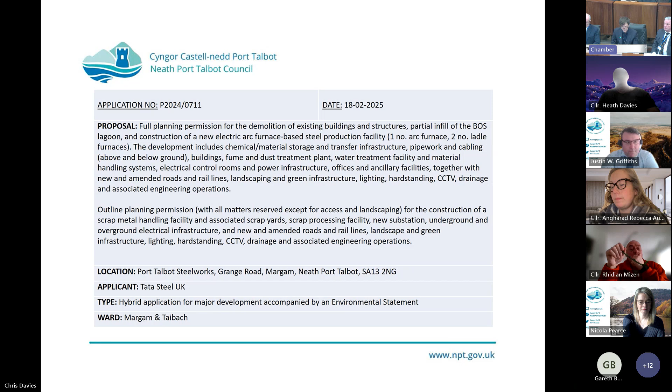The application site extends to 159.6 hectares. Its boundary, shown on the plan, is irregular in shape and includes the following parts of the existing steelworks: a continuous casting plant, slab yards, part of a basic oxygen steel making (BOS) plant to the northern part of the site, an operational lagoon in the centre of the plan, steel service centre, Margam Colliery Memorial in the centre of the site, a haul road forming the westernmost boundary, coal yards in the southwestern area, and areas of grass meadow to the south.

Where you see indication 1 on the plan, that is the area where the electric arc furnace will be constructed. This plan identifies the areas of Port Talbot, the heavy end with the former blast furnace and sinter plant. You can see the ABP jetty, Swansea Bay, and indications for the main railway line, the PDR, and the M4 to the east.

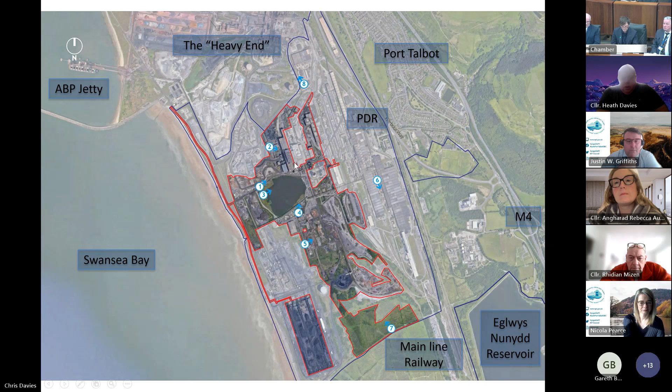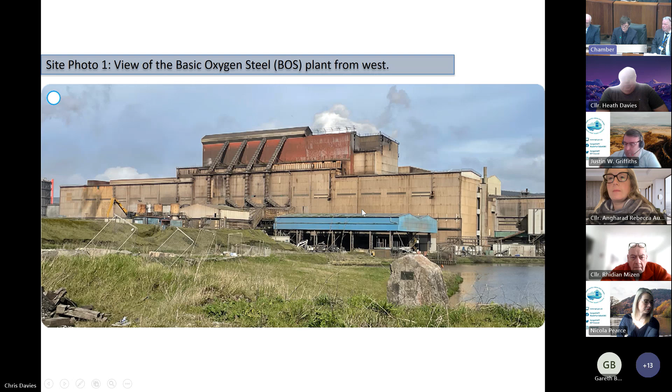So number 1 is the basic oxygen steel plant, the BOS plant. For context, that building is approximately 430 metres long and 60 metres high. You'll see this plant in a number of the images below, and this is the plant that the electric arc furnace will be constructed predominantly around.

Areas 2 and 3. Area 2 is a close-up view of the BOS plant from the west, and photo 3 shows a view across the operational lagoon.

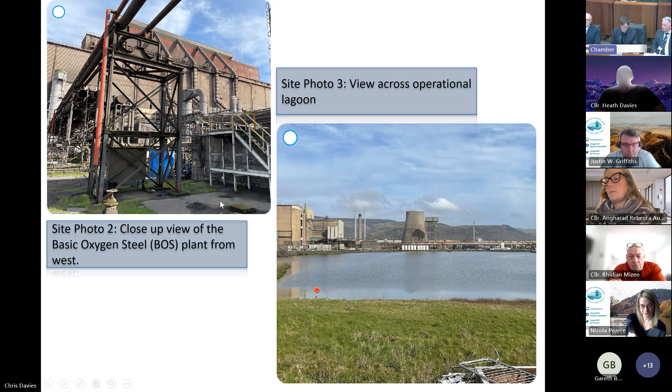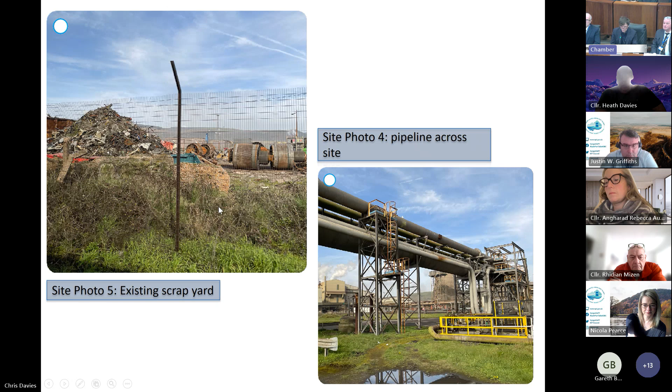4 and 5. Image 4 shows the elevated pipelines across the site, and 5 shows the existing scrapyard area.

6 and 8. These show you the views between the existing rolling mills, which are quite large structures within the wider landscape of the steelworks. And 8 shows the blast furnaces to the north of the site.

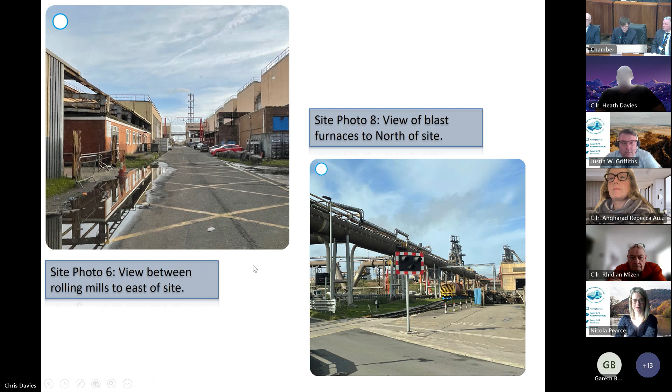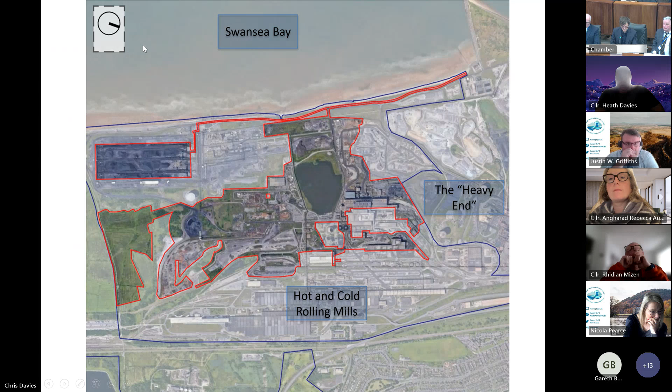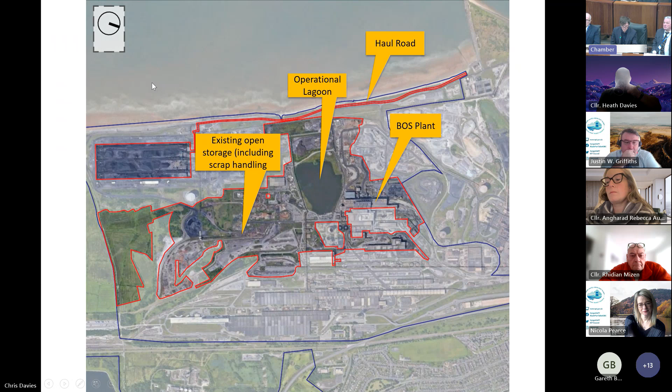Again, some further images of the site from outside, looking into the site from various directions: the BOS plant, the haul road, the operational lagoon, existing open storage including scrap handling, existing coal stockyards, and the Southern Grazing Fields Lagoon.

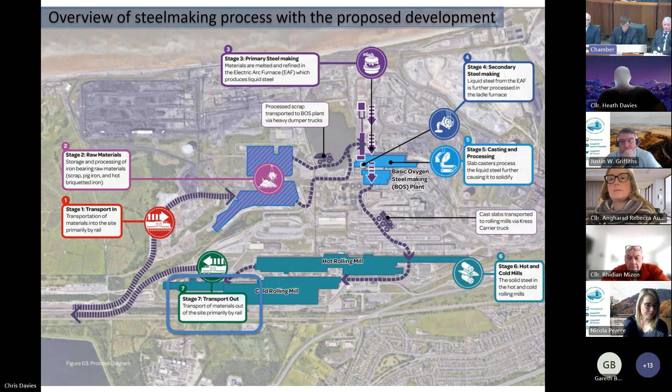The main components of the proposed development can be summarised as follows. The full planning application consists of alterations to the BOS plant, a secondary refining building collectively comprising the EAF, water cooling systems and water treatment plant, fume and dust extraction systems with stacks, offices and ancillary facilities, the partial infill of the BOS Lagoon, new and amended rail tracks and infrastructure, new and amended roads, gates and parking areas, and landscaping and green infrastructure. The outline area, outlined in red but outside of the green, covers the scrap metal reception, handling and processing facilities and associated scrap yards.

This also includes new substations and overground electrical infrastructure, amended access roads and parking, and amended rail track and associated infrastructure. Full details are set out within the report, with these areas defined on pages 14 to 19. This proposal is the largest initial element of the overall investment of £1.25 billion within the Port Talbot Steelworks.

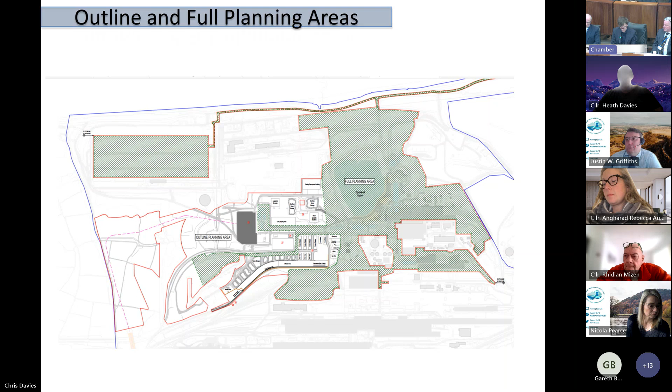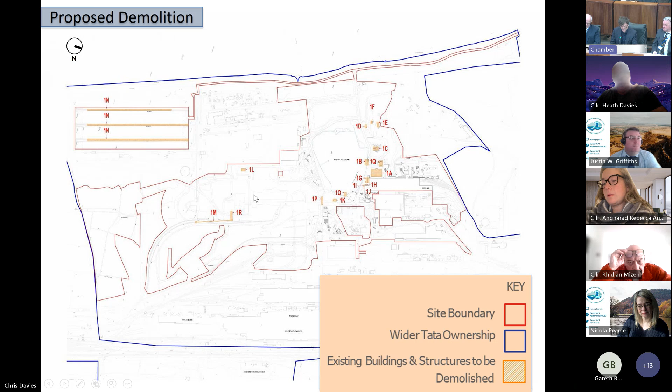This plan gives you an indication of the structures to be demolished as part of the proposal, to make way for the proposed development. These are some of the structures and buildings that will be taken away to facilitate it, along with further structures that will be demolished.

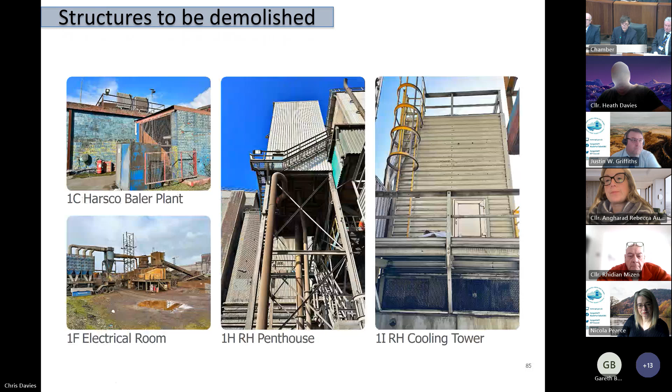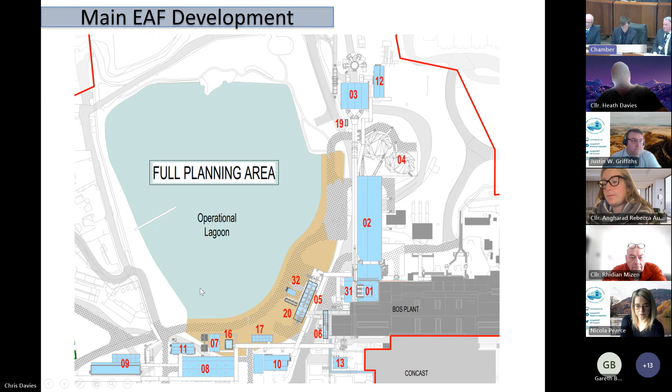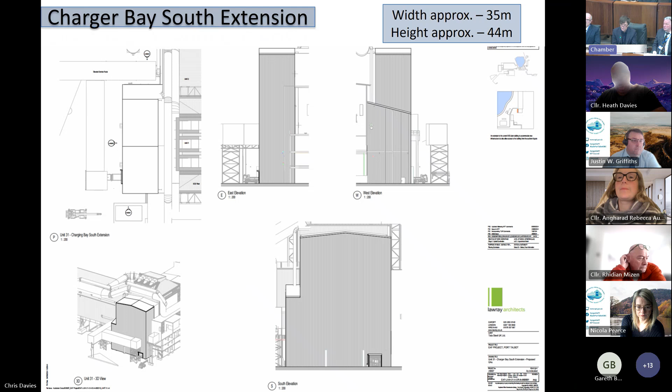These are the main components of the EAF itself: the Charger Bay South extension, an extension to the side of the existing BOS plant, and a canopy hood that will be attached to the roof of the BOS plant itself.

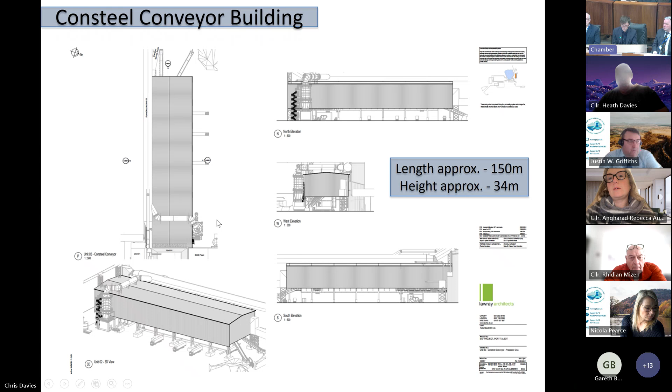The Consteel conveyor building—to get a sense of scale, you can see the trucks in the bottom corner of the plan underneath the conveyor. This will convey the scrap steel into the electric arc furnace itself.

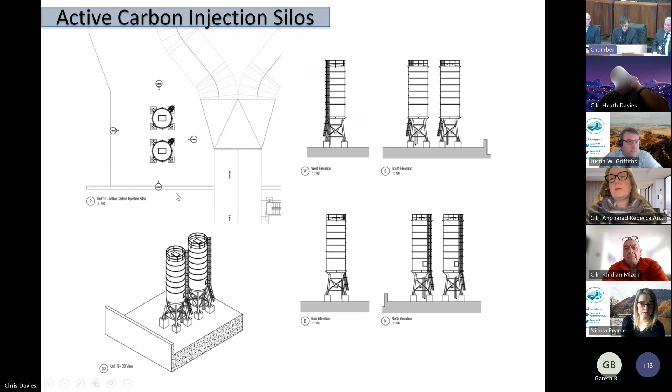Fume treatment building and stack. Active carbon injection silos. Ferroalloy bunker. Hot briquette iron dolo lime bunker, and powder silos.

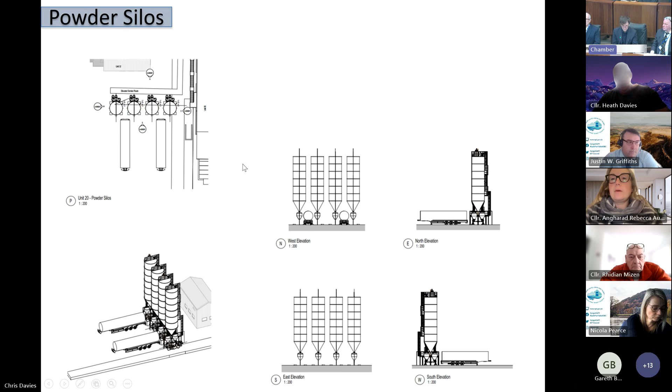These are the main components and how they sit alongside the EAF and the lagoon. Molten metal will be tapped from the EAF at a production rate of 320 tonnes of steel every 42 minutes, creating an annual production capacity of approximately 3.2 million tonnes per annum.

The fume extraction plant includes active carbon injection and dust bag filters, which will be subject to environmental permit, requiring the use of the best available technologies issued by NRW.

The EAF input and output are summarised on Table 1 on pages 23 to 27 of the report, and the ES provides the following indicative programme of works: commencement of construction mid-2025, construction complete late 2027, commissioning mid to late 2027, and operational first melt early 2028.

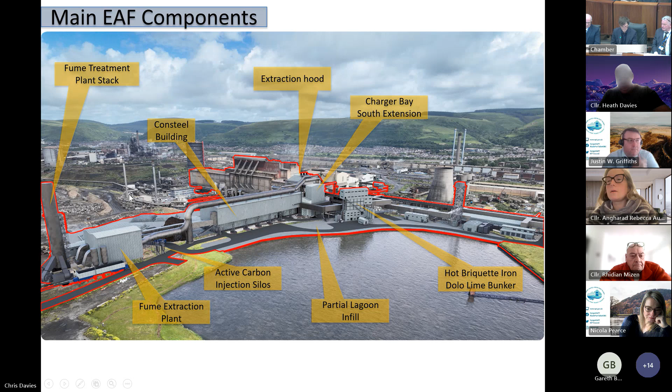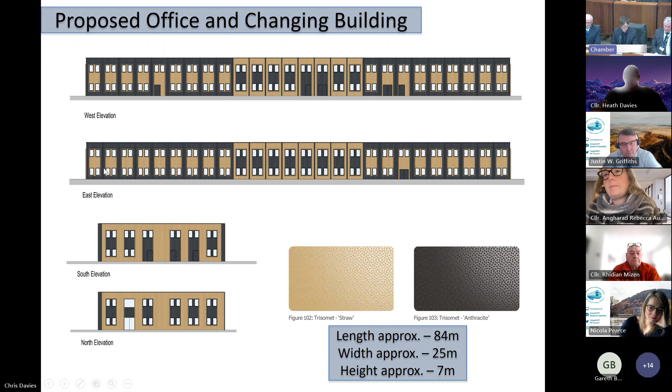The proposal also includes an office building constructed to the east of the BOS plant to house operators for the EAF facility. There will also be a new car parking facility to allow workers to travel to and from the site, which includes EV charging.

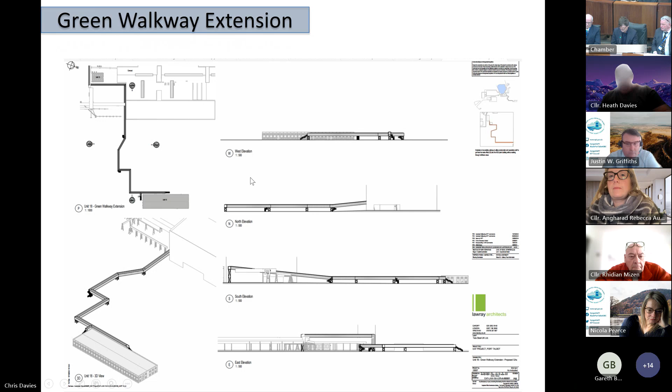There's what is termed the green walkway, which will take workers to and from the EAF itself. You can see indicated on this image the office building and car park, the green walkway, and the extractor hood and the fume plant—this is looking from the opposite direction than the previous photo shown.

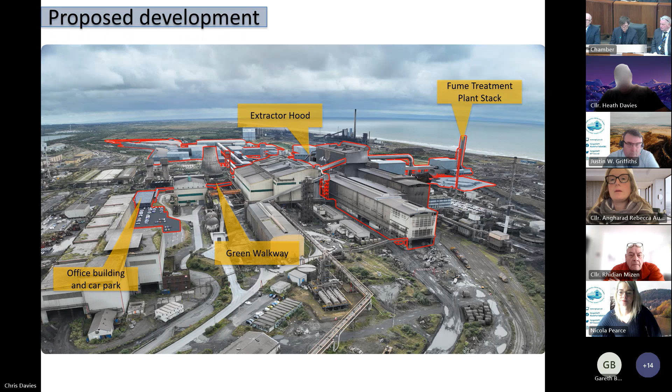So other main structures and buildings within the area of the full application—there's quite a lot of these and they're quite technical, so I'm not sure if anyone's that interested in them, but we'll put them up anyway.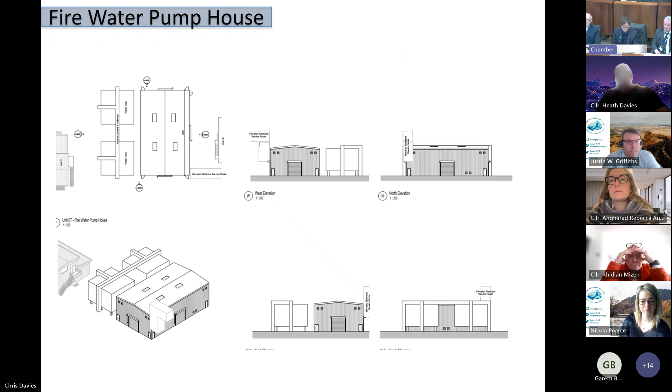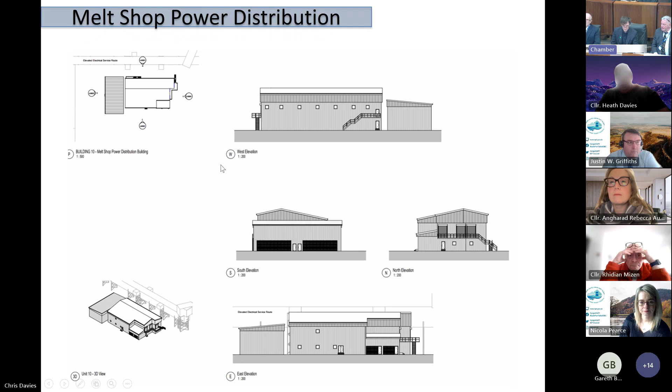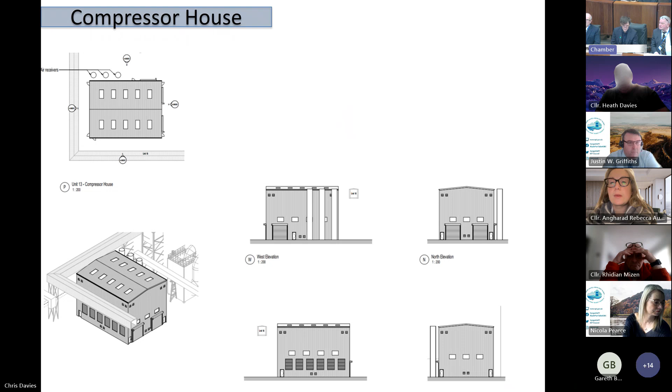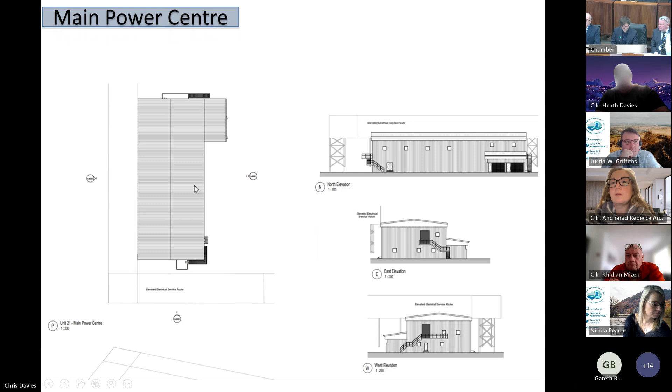Fire water pump house, primary pump house, secondary pump house, melt shop power distribution, melt shop WTP electrical, melt shop FEP electrical, compressor house, emergency tank, lagoon water pump house, the main power centre, power compensation building, HBI electrical building.

In terms of the illustrative outline plan, that's the area outside of the hatched green. This will cover the scrap storage and potential scrap processing, open storage including silos, plus an acoustic barrier to address any noise, rail infrastructure works, electricity substation and associated works.

The proposal also includes landscape and ecological mitigation enhancements, details of which will be shown later in the presentation.

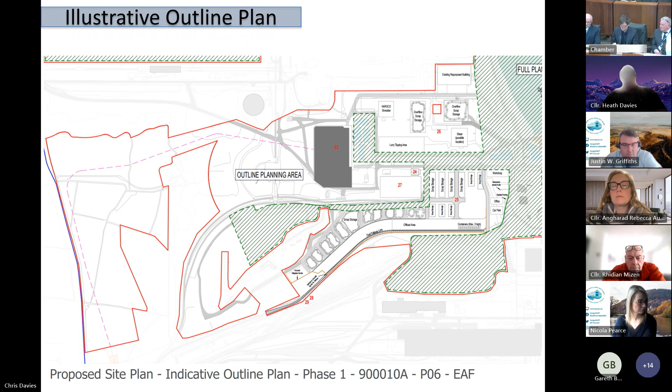This gives an indication from the other end of the site, looking back towards Port Talbot. These areas are predominantly in the outline application. You can see the fume treatment plant in the distance and the Consteel building, where the acoustic barrier is shown around the area for the rail and scrap unloading, material storage, and the indication of the parameters of development for the National Grid compound.

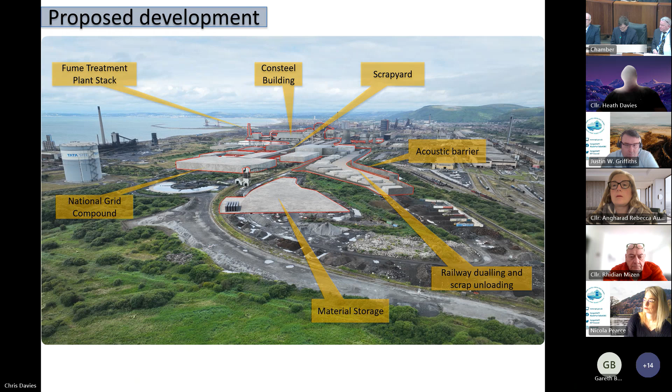Consultations are set out and responses are set out on pages 40 to 44 of the report, and planning policies at national and local level are set out on pages 44 to 49.

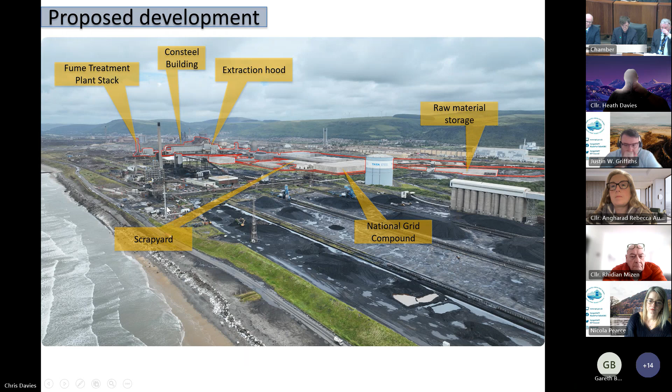Again, these show the acoustic barrier and the areas of outline of the application, and in the distance the Consteel building and fume treatment plant.

As required by the EIA regulations, the applicant has considered alternatives as part of the application, the EIA submission. As part of this, they have to consider the do-nothing scenario.

The applicant has indicated publicly that the losses currently sustained are not sustainable to continue with, and therefore an alternative business model and significant new investment is required to support the continuation of the UK business. They have set out that maintaining the status quo facility, which emitted approximately 20% and 2% respectively of Welsh and UK national emissions in 2022, would be very challenging in a net zero-led policy environment, where public and consumer pressure is increasingly focused on clean and sustainable products.

The applicant has already closed the heavy end, made up primarily of the 2 blast furnaces and sinter plant, and the coke ovens and associated infrastructure of the wider steelworks, in September 2024.

The main issues considered as part of this application relate to the principle of development, impacts upon landscape and visual amenity, heritage and archaeological assets, residential amenity, noise and vibration, air quality, light pollution, parking and access arrangements, highway and pedestrian safety, socioeconomics, hydrology, drainage, flood risk, biodiversity, health and safety, risk to human health, and waste management. These main issues are set out on page 50 of the report.

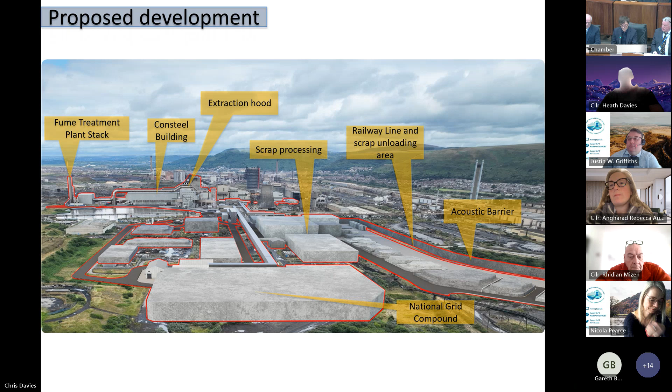In terms of landscape and visual, this is the ZTV and viewpoint plan taken from the application.

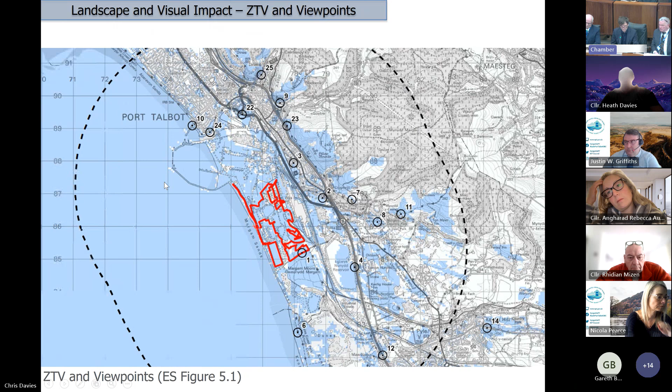There are other residual impacts post-development. These are considered acceptable within the site context, the existing steelworks, and accord with the development plan.

Residential amenity is considered on pages 61 and 62, and no adverse impacts have been identified from overlooking, overbearing, or overshadowing. Matters of disturbance via noise, lighting, and air quality have also been considered within separate sections of the report, and are subject to conditions considered acceptable. There's also a human health section considered on pages 95 to 96.

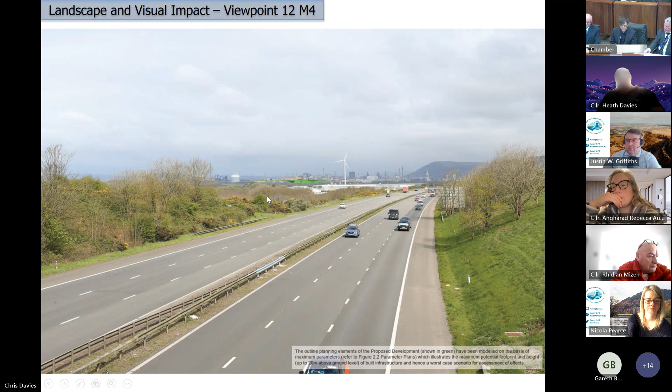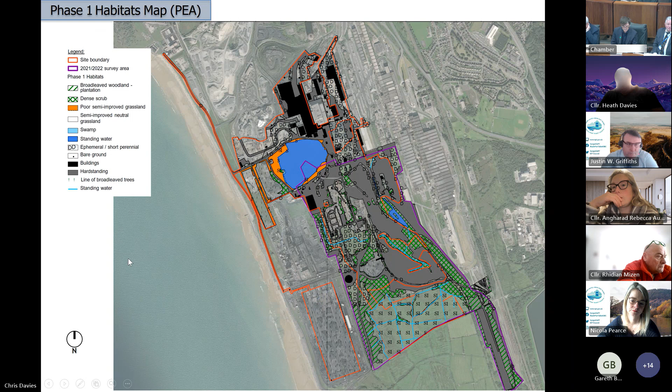This plan gives an indication of the existing ecological habitats on site at the moment, and the following plans show the proposed ecological mitigation enhancements around the operational lagoon as part of the EAF proposals.

The application is supported by a Landscape and Ecology Management Plan, or LEMP, and the Biodiversity Management Plan. As detailed within these landscaping plans, full details are controlled by conditions and by the Section 106 agreement, which will secure delivery and management over 30 years.

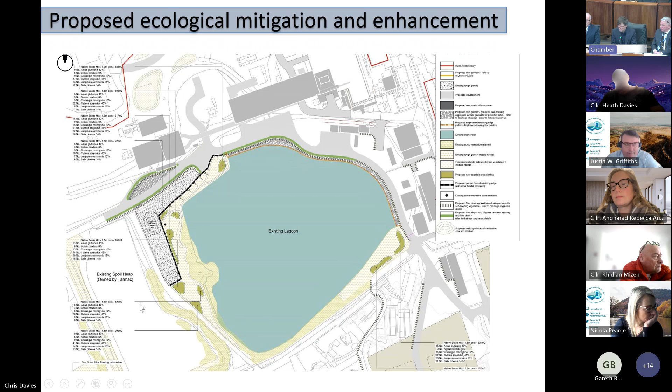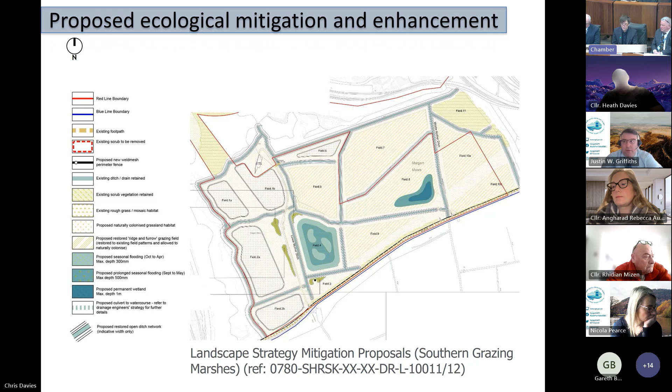The landscape design proposals are primarily ecology and hydrology led, focusing on measures to restore and enhance retained areas of brownfield and greenfield habitats within the coastal plain. These areas of greenfield to the south show the mitigation proposals as set out in the application.

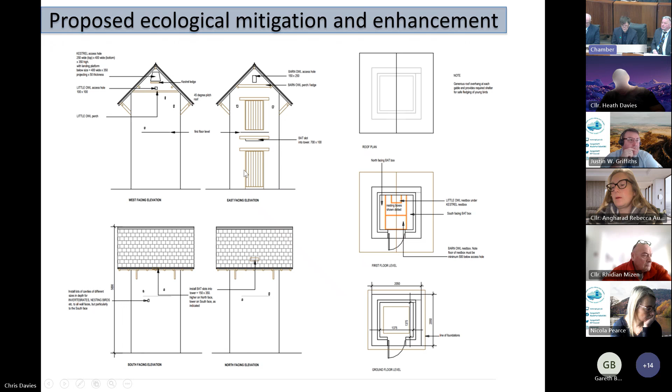We've also got proposed artificial sites for barn owls and bats also proposed.

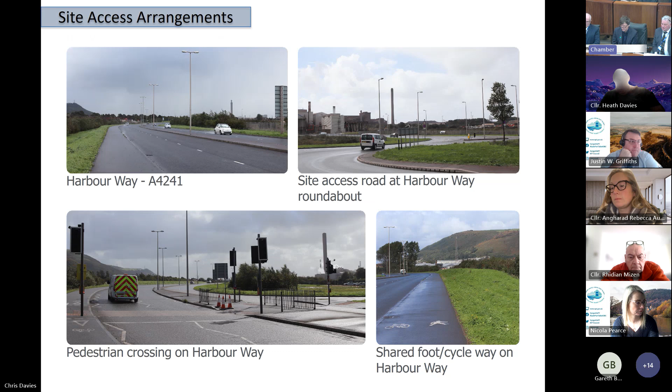Site access arrangements remain the same, with a significant reduction in road transport to and from the site, and the main focus being on rail. There's also a condition requiring active travel improvements, to be imposed as a Grampian condition as part of the proposal.

In addition, in relation to SUDS, whilst it will require a separate consent, the applicant has provided an indicative drainage strategy, which includes clean and polluted separated systems and also includes ecological features and enhancements.

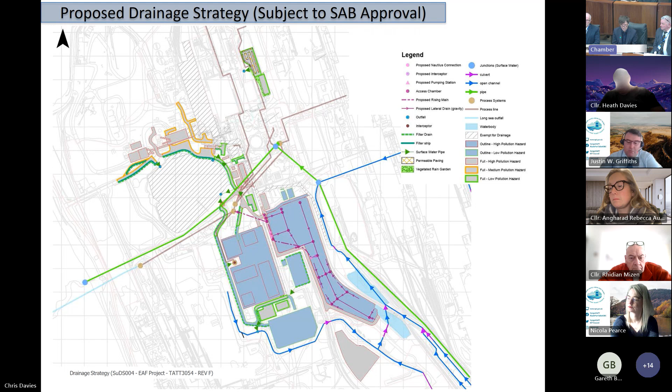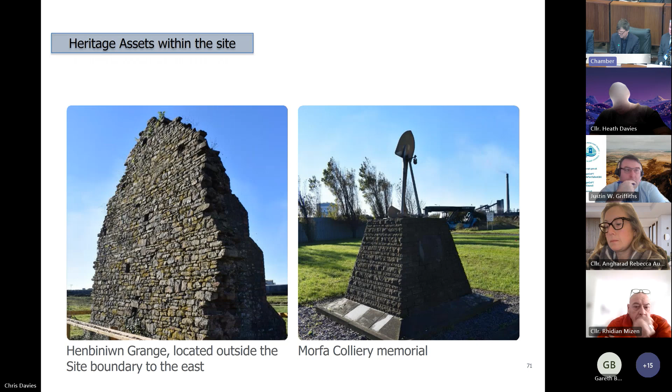There are a number of heritage assets within the site as a whole, afforded protection now and during the works. Heneb, who recently changed their name from Glamorgan Gwent Archaeological Trust, requested a condition regarding a written scheme of investigation as part of the proposals, and that's been imposed as a condition of any permission issued.

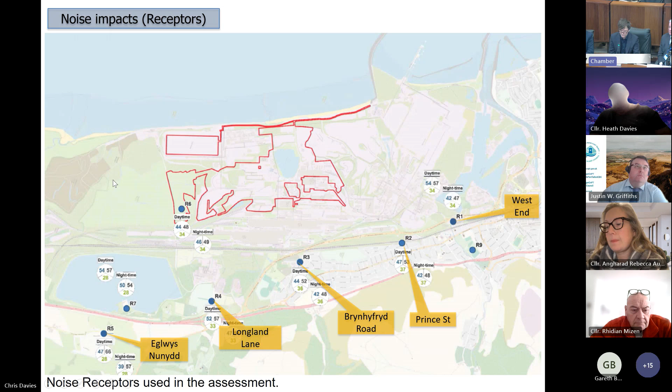In terms of noise, this plan shows the site boundary and identifies some of the receptors assessed in relation to noise and vibration, including residential sensitive receptors, designated areas, and ecological receptors.

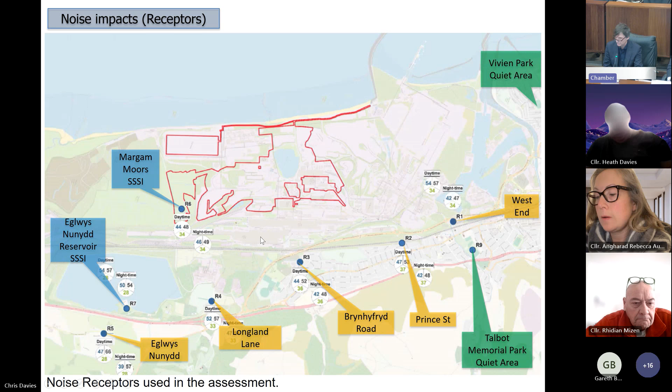The authority appointed an expert consultant to look at the application and consider the details submitted, who recommended the conditions imposed on the application, clarifying there are no fundamental issues in relation to noise. There's embedded mitigation within the EAF plant itself, and the screening mentioned earlier for the outline application will provide mitigation as part of that scrap area as well. Those conditions, in relation to noise and vibration, are all set out within the report.

Air quality. Too far.

The air quality impacts are set out on pages 70 to 73. It should be noted there are also a number of conditions relating to construction as well, which cover a lot of these issues. There's also a climate change and sustainability section on pages 96 to 100 that outlines significant reduction in greenhouse gas emissions.

During construction, which is also dealt with in the ES, approximately 20 conditions are proposed. These cover demolition, construction management, air quality, noise, vibration, coal mining legacy, materials management to both protect amenity and the environment. Land contamination is also addressed.

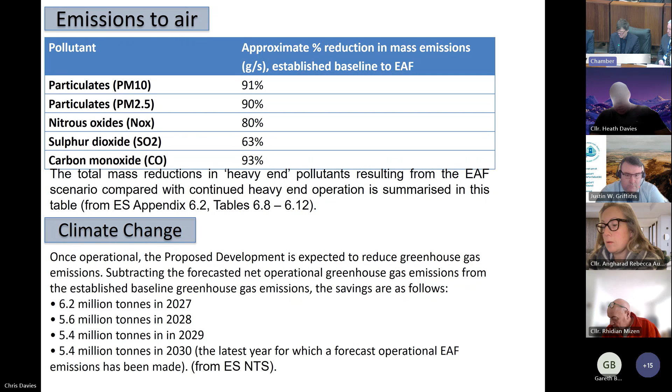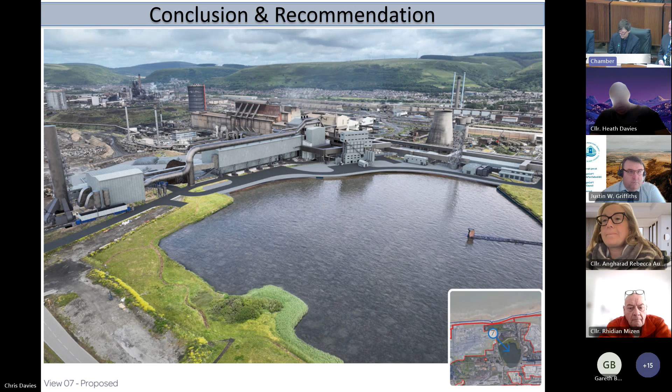The summary of effects set out within the ES are set out on the table on pages 105 to 115 of the report. The proposal forms part of a 1.25 billion investment in the Port Talbot facility, supported by the UK and Welsh Government. The applicant has reasonably demonstrated that the future of the Port Talbot facility is entirely dependent on the planned investment in the EAF.

It is also clear that this could lead to potential further investment in the site to protect its long-term future and diversification. All identified effects of the development should be considered in this context.

In determining this application, weight must be given to the various material considerations outlined within the report, and determination of where the planning balance lies between the positive and negative effects of the development.

It is considered that the proposal represents an appropriate form of development where the adverse impacts of the development identified are outweighed by the benefits of the development in terms of the retention and transition to electricity-based steelmaking, and in terms of greenhouse gas emissions and zero carbon aspirations.

Our recommendation here today is to approve this application subject to the conditions set out before you and the signing of legal agreements under Section 106 of the Town and Country Planning Act, to secure both biodiversity enhancement over a 30-year period and a steering group for that management, and additionally a unilateral undertaking that covers the heavy end area of the site to ensure that the assessments made as part of this application are robust and acceptable.